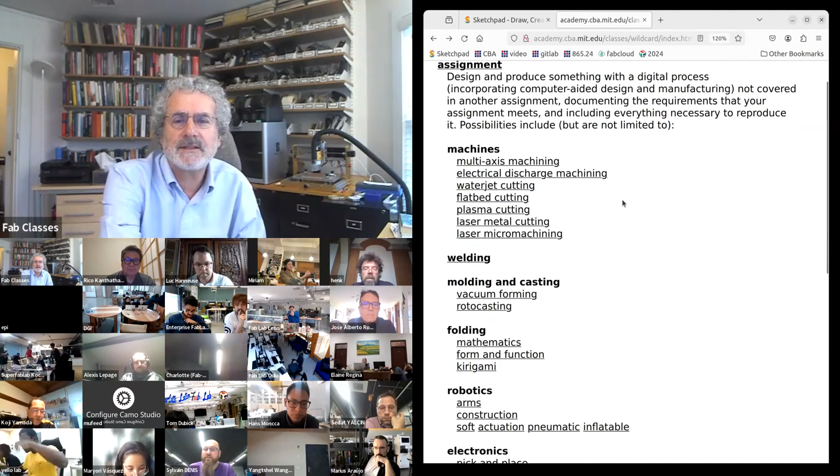In the past, this week was just composites. I have linked to an example here. I'm going to spend about half of class today talking about composites. Tom is asking about computer vision, and Tom, the answer to that's yes, I'm going to come to that. Previously, everybody just did the composites assignment, and you could still do that. But I'm going to spend the first half of class giving you a tour of many other options that would be fine for this week. So first we'll do breadth with many options, and then I'll drill down into composites.

So first one is multi-axis machining. This is a 5-axis machine tool in my shop at MIT. It moves in 3 axes, X, Y, Z, and then it can rotate and rock. That's about a $100,000 tool.

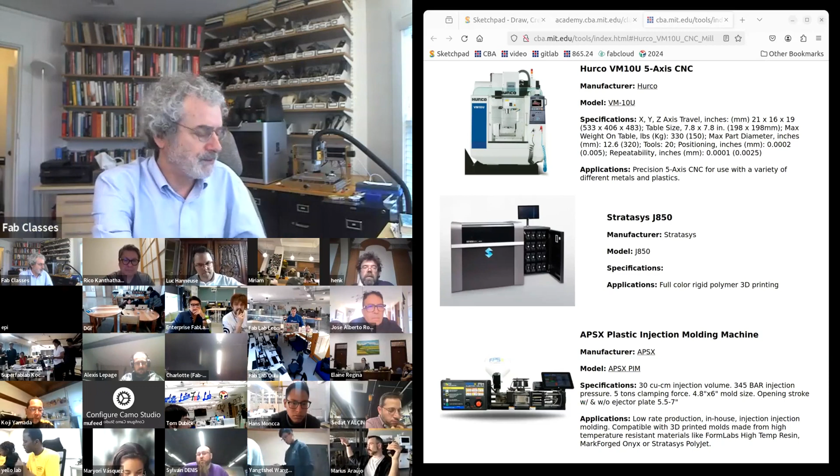You can do that. This is an $800 3-axis mill where you can add a 4th axis. And in fact, for multi-axis machining, in molding and casting, if you printed a mold, you could use this week to do full 3-axis machining. So if you've only been doing 2-axis machining, you can use this to do 3-axis machining. But what I mean by that is a toolpath that's moving Z while moving X or Y at the same time. And if you have access, you could use this to work on 4-axis machining where you rotate while you machine, or go up to full 5-axis machining. There's all sorts of things you can machine in materials that are hard to print, to do multi-axis machining to make more complex geometries with beautiful surface finish.

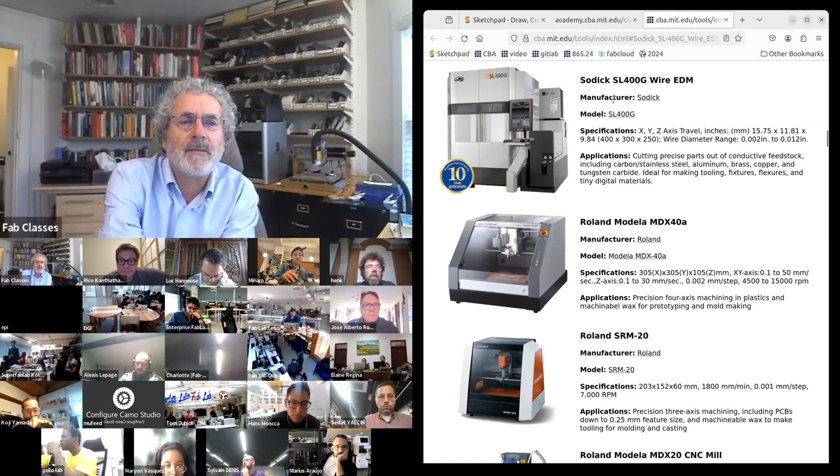So that would be fine for this week. EDM, this is an EDM in my shop. If you have access to that, it's a wire, and then a plasma is produced around that wire, and that eats away at metal, and that lets you make metal parts with high aspect ratios with beautiful surface finish.

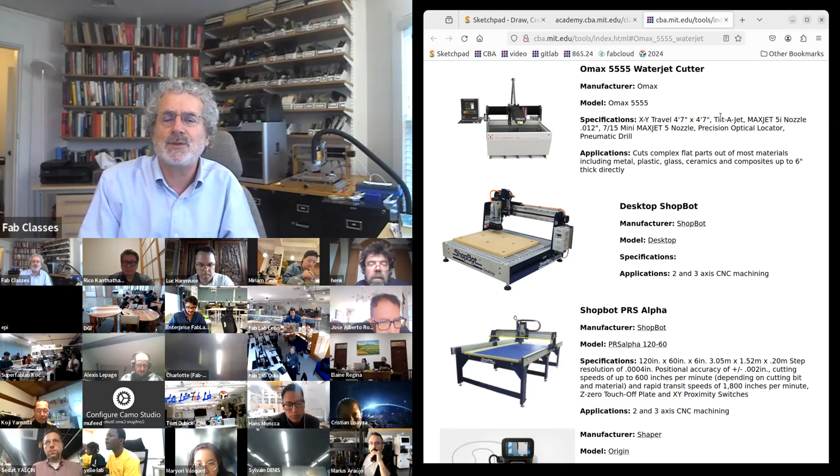This is a water jet cutter. Again, that's about a $100,000 tool. Not Waver, Wazer - Wazer is about a $10,000 smaller tabletop version. The water jet cutter cuts with a supersonic jet of water entraining a garnet abrasive that machines ballistically. And the great attraction of that is you can cut material you can't machine. So glass, stone, ceramic, all sorts of materials that aren't machinable, you can cut with the water jet. That would be fine.

This is a Zund cutter. Again, about a $100,000 tool. It's like a giant vinyl cutter, but a big difference from a little tabletop vinyl cutter is there are many degrees of freedom in the head. So you can vibrate, you can rotate, you can angle, you can punch. There's many more operations than just dragging a knife. And so learning to program a large format flatbed cutter is an interesting thing you can do this week.

Water jets consume a lot of garnet.

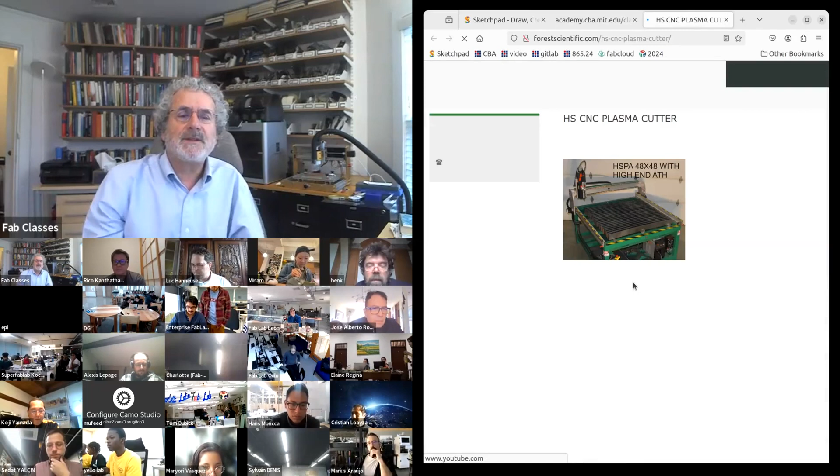Plasma cutters use a plasma generator to make a torch that melts metal. So this is only for metal, but it lets you do large format metal cutting with a plasma torch. Originally those were pretty messy, there's a lot of slag. It's still hazardous and dangerous, you need a workspace where you can shoot out a plasma jet, but the quality of the cuts has gotten much better, so they're much cleaner.

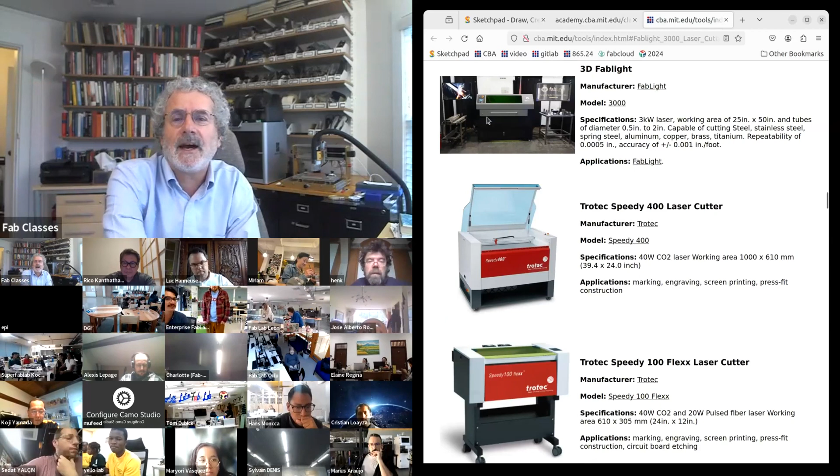Much higher power lasers can cut metal. This is a fiber laser that can do laser metal cutting. And this is another kind of laser in my lab that does micromachining and lets you make micron scale parts with a very different workflow. So all of these would be fine for this week as more advanced kinds of machining.

Welding is a universe - you can do it with oxyacetylene, MIG, TIG, or other types of welding. The welding itself can be manual, but welding is acceptable for this week if you start with a metal cutting process and then use welding for the joining.

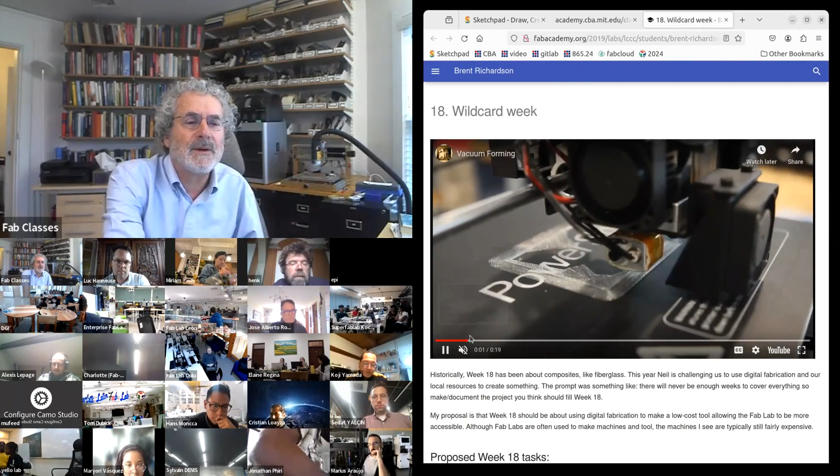We all did molding and casting. We didn't do vacuum forming because it's less universal, but many of your labs have a vacuum former.

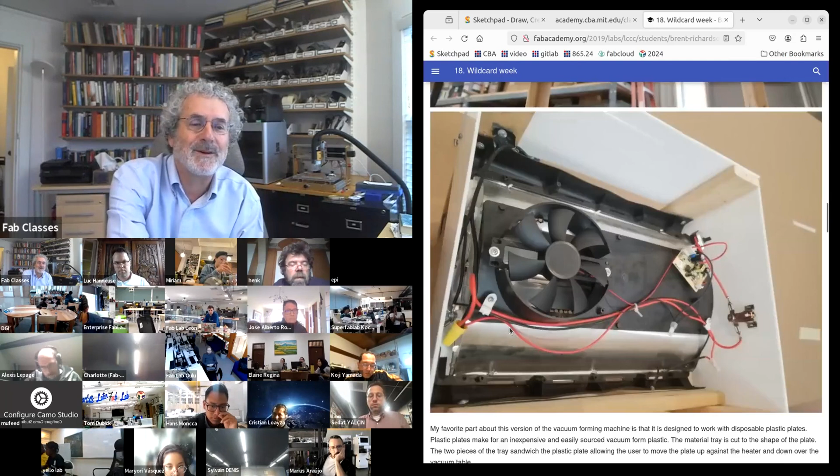This is a project where the student made their own vacuum former, but it shows the process nicely. You heat a plastic that softens, then pull a vacuum that pulls the plastic around your part. When it's done, you get a faithful reproduction of your part. This example, which included making the vacuum former, was used to make a form for custom soap.

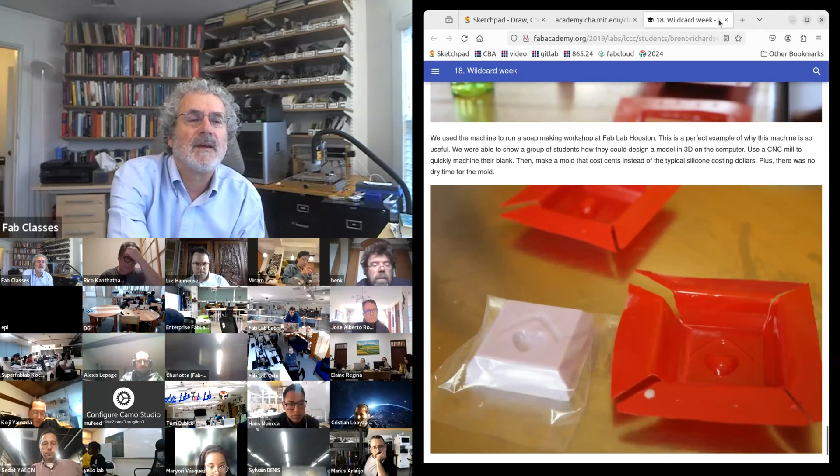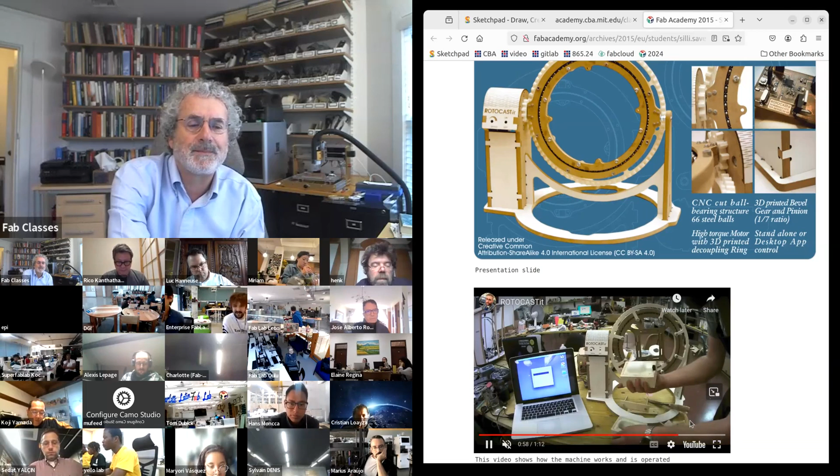So that's vacuum forming. Again, this was another project where making the machine itself was the final project. I'd shown this in molding and casting, but if you have it, you could do that this week. Roto casting is where you tumble the mold to cover the inside surface of the mold. So those are some kinds of molding and casting.

An interesting thing you could do this week is fold. Erik Demaine is a colleague at MIT who's known for taking origami and turning it into a rigorous subject.

Let's see, his site doesn't seem to be loading. I'll send him a note about that. Oh, let's see, is it a network issue? No. Not sure what was happening there.

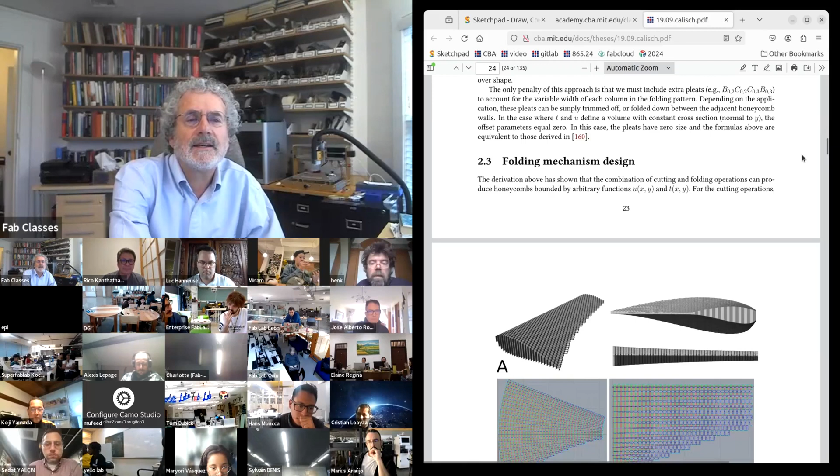This was a student thesis in my lab on cutting and folding. He developed really interesting processes to take a 3D design and turn it into a 2D cut pattern you can fold to make the 3D shape.

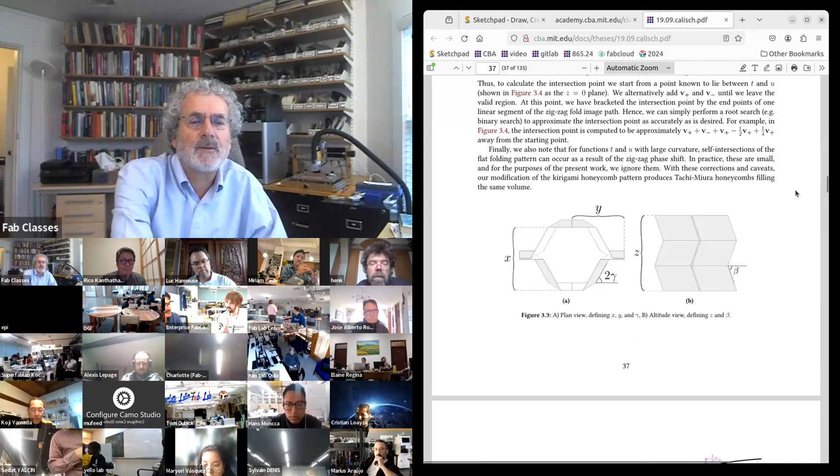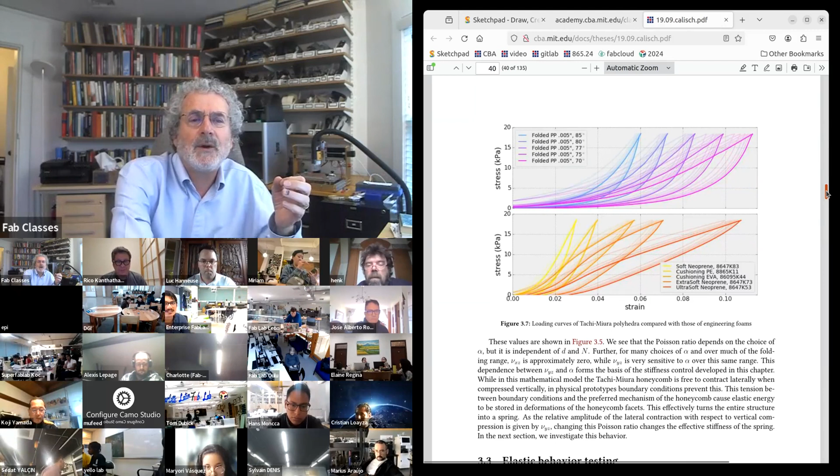He also developed machines to automate the folding. And he went on to show that by varying the cut pattern, you can vary the mechanical properties. So you can have a single sheet stock, but tune it as if it's a wide range of elastomers - here he has a single material. This is the stress versus strain, and he's showing that he can match the range of those properties just by how he folds it.

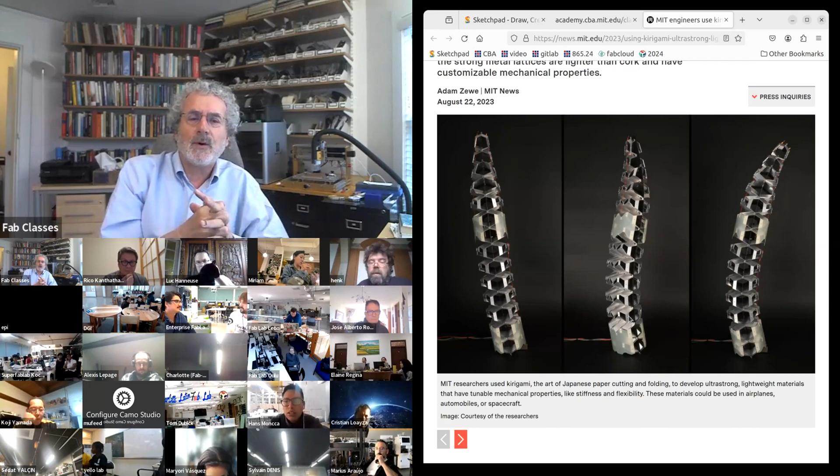This was follow-on work from one of my students on kirigami, which is origami with cuts as well as folds, doing metal folding. In the linked paper, he shows how to design high strength folded structures by cutting and folding metal, which you can also do in other materials.

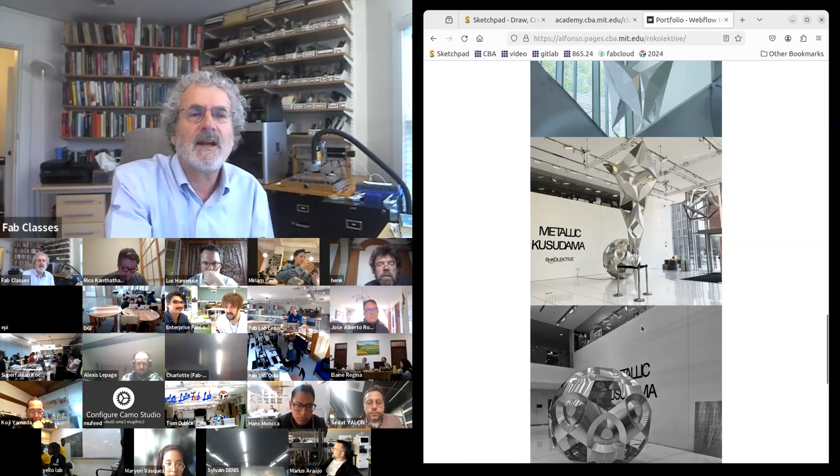A really neat thing he did - I think the easiest way I can find that is here - using those techniques, he did a large format art installation where these pieces were made by cutting and folding. This is an aluminum polymer laminate cut on a large format flatbed cutter, and each of these in hours went from sheet stock to these folded structures.

So folding, and in particular folding to make 3D forms and tuning mechanical properties, is something you can do this week.

For robotics, these are robotic arms in my lab. Something you can do is program the arms themselves to do things like automating assembly. You can also put end effectors on them.

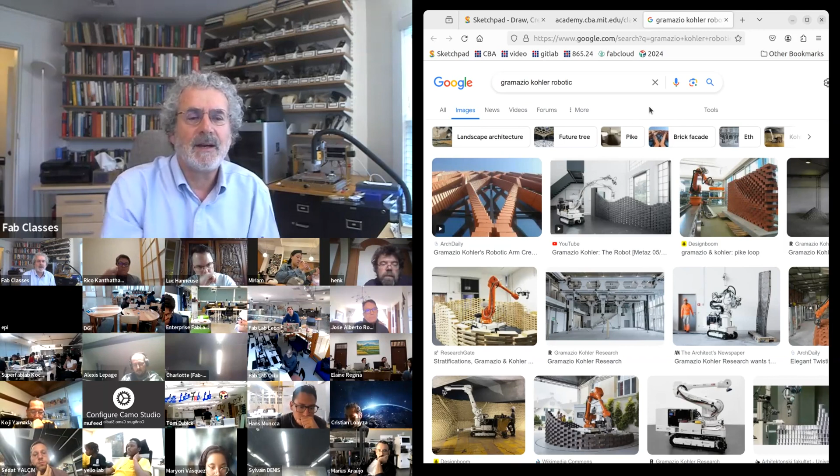Colleagues at ETH in Zurich are masters of programming robots to do building construction. So these are just examples of work in their lab of programming robots to construct.

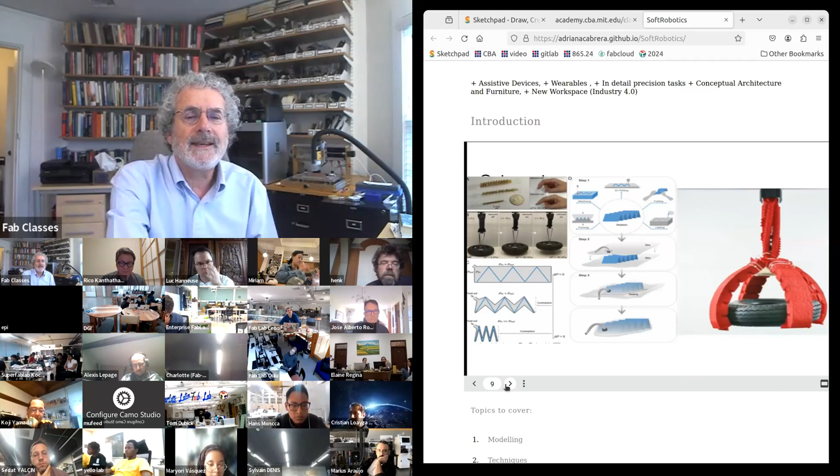Soft robotics is... Adriana, one of the gurus, has this nice tour through molding and casting elastomers to make robots that you deform pneumatically. You can make all sorts of mechanisms, locomotions, robotic behavior.

A colleague at Harvard, George Whitesides, helped inspire this. He made all of these beautiful creatures just building on the molding and casting you've already done.

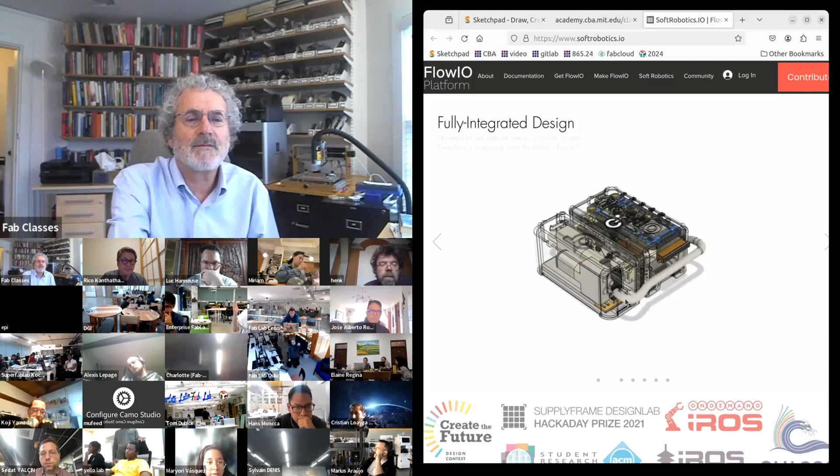This was a student from How to Make who went on and made this little module that makes it easy to program pneumatics for soft robotics. So it's not just the soft robot, this is a kit to make it easier to make soft robotics.

So you could experiment with soft robotics.

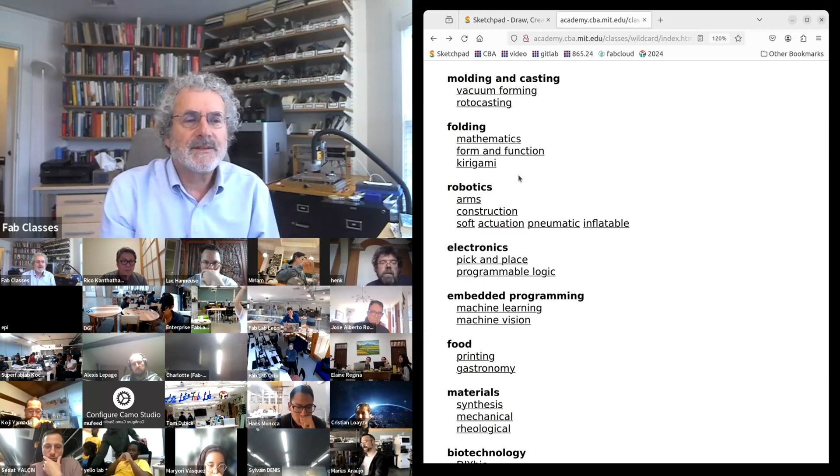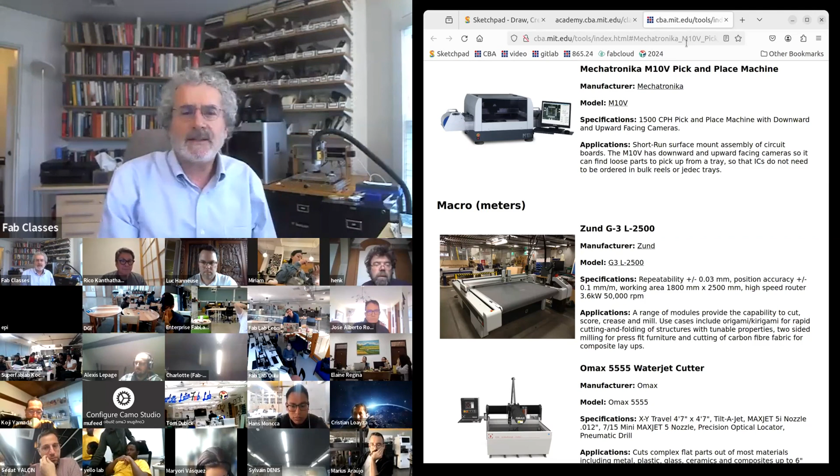Then for electronics, there's a number of ways you could extend it. One is this pick and place in my lab to automate electronics assembly. There's a number of lower cost DIY pick and places emerging. Using a pick and place to do short run electronics production is a new sort of skill.

And then in the embedded programming class, I just briefly mentioned PLDs and FPGAs, and learning to program programmable logic is very different from microcontroller programming. So that would be fine.

Then for embedded programming, this is a link to TensorFlow Lite that runs in microcontrollers. There's also TinyML. These are different enough from the coding I taught. I briefly mentioned this, but we really didn't do it. So learning to do machine learning in embedded systems is fine for this week. It needs to start with electronics that you've made and interfaced, but learning to run machine learning in embedded systems is different enough that's fine.

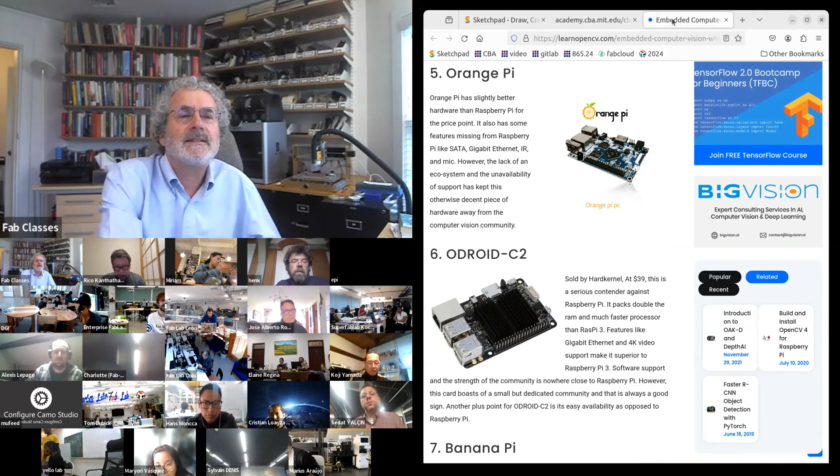Likewise, OpenCV—this is a link to platforms for embedded video. OpenCV is the standard framework for machine vision. Once again, I've only noted that, but implementing embedded machine vision is a new enough skill to be fine for this week.

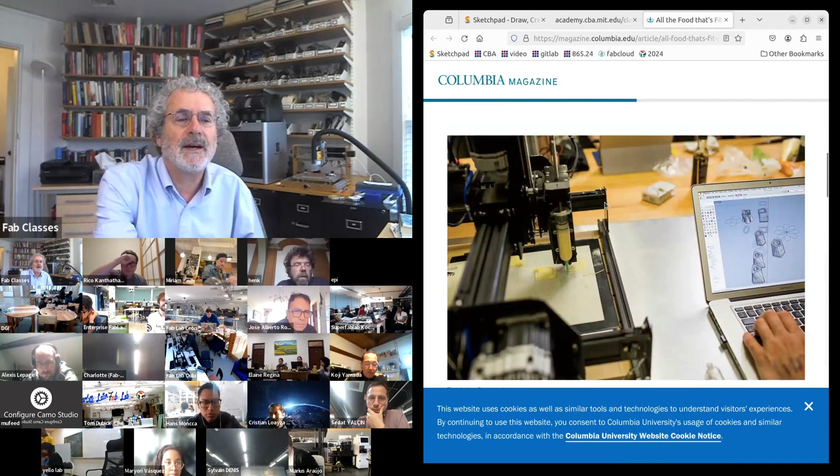Food. This is a colleague who's been experimenting with printing food, extruding it. In particular, they've done a lot of work to understand why you do that, what you can print to make food that you can't do any other way. So playing with food printing.

This is a former Fab class student who got interested—oh, his site is down—but he's experimented with using the range of our tools with food. So using molding, casting, printing, milling, laser cutting, but doing it safely with food to produce food. And not doing it as a parlor trick, but looking at the benefits of that.

So you could experiment with food. Then a really interesting thing you could do this week is experiment with the materials themselves. So Materiome, which we've talked about before—they have a really nice library where you can tour the ingredients in and the applications out.

And so now for most of you, you've just used materials available in the lab. A really interesting thing you could do this week is look at how you use locally available resources like eggshells, coffee grounds, gels, and then from those locally available resources, you can produce materials. And then if you produce the material, going through the existing machines is fine—milling or laser cutting a material you produced is fine for this week.

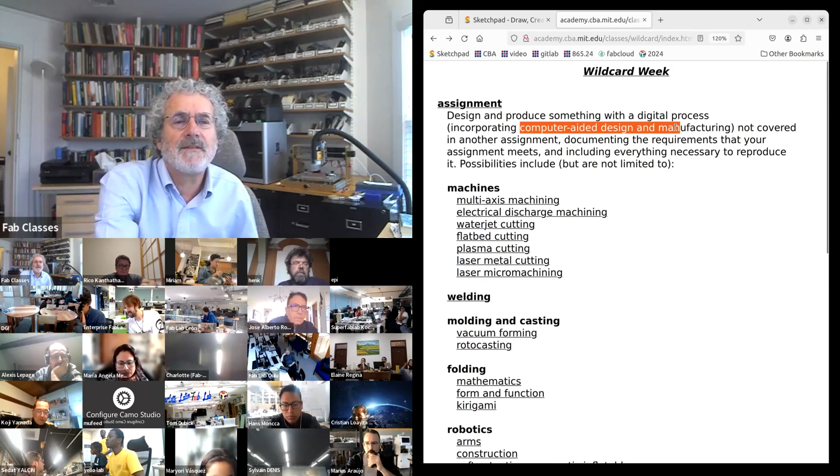Another sister class is Fabricademy to learn about textile technology, and the range of skills they cover fits for this week. So these are all options to work with textiles, and any one of these involves computer design and manufacturing, which is something we haven't covered. This is a broad tour I just did - it doesn't restrict the universe. You don't have to do one of these; you can use anything that meets these standards, but this gives you a feeling for the options for Wildcard Week. And what's fun is seeing the range of what people accomplish.

So that's breadth. Now for the rest of class, I'm going to descend in on composites. I'd say the laser cutter is the most overused tool in a fab lab, the vinyl cutter is the most underused tool, and I'd say composites is the most underused process. Composites let you make large, light, strong things with complex shapes, and it's accessible in fab labs, but not widely deployed.

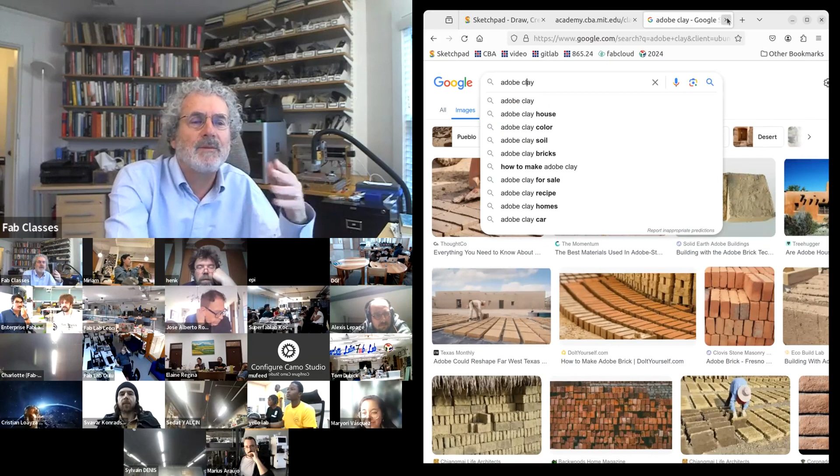Adobe is an ancient composite - not Adobe the software company, but adobe construction, which involves clay with natural fiber reinforcing. Paper mache is a composite. And the most important composite of all is wood itself. What makes trees stand up is the wood fibers in the lignin matrix together making a composite. So all of those are examples of composites.

Now for you to make a composite, you have to pick the fiber and the matrix. You can get the fiber in many forms. You can get chopped fiber that are short segments. Chopped fiber is convenient, but they don't make particularly good composites - there isn't good force exchange between them. If you're making a mold and you put in chopped fibers, it'll have better mechanical properties than not having them, but it's not nearly as good as continuous.

You can have individual filaments that you wind. You can have composite tapes, and that was going on in the machine that makes the barrel. One of the most convenient ways is to start with fabric - continuous sheets of any of these fibers. You cut the fabric to size, and then you lay up the composite. They're convenient and better than not continuous, but mechanically, for things like airplanes, for state-of-the-art composites, it's essential to have continuous fibers.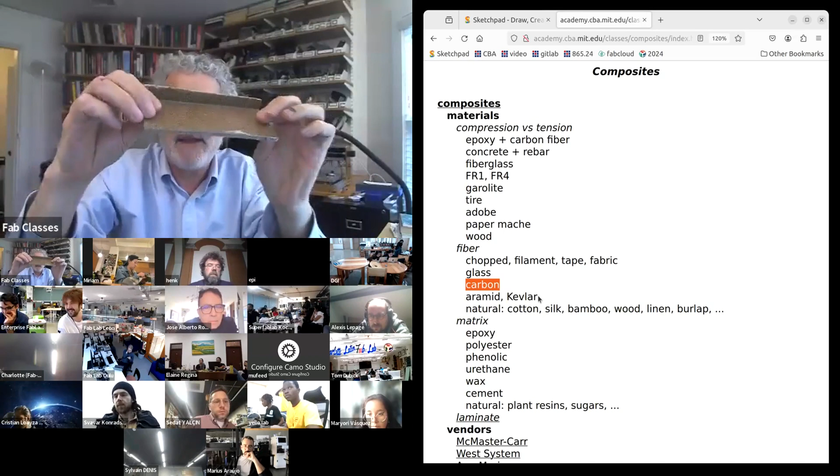In fact, I'm going to grab something up here, I'll be back in a moment. I happen to have next to me here a sample of a natural fiber fabric composite in a matrix. It hurts if I hit myself on the head on it - I can't bend it. This is fabric in a matrix as an example of a natural fiber composite. I wouldn't make a jumbo jet out of that, but anything short of the stiffest, strongest, lightest materials, you can make really nice composites with these natural fibers.

Then to make the matrix, there's a number of options. Most common is epoxy, but just conventional epoxy isn't environmentally friendly - I'll talk about the coupon test shortly. Traditional epoxy is not environmentally friendly, and it also needs really good ventilation. Phenolics are used, urethanes, cement in cement composites. But again, there's a lot of work on natural resins, and I'll show you when I get to vendors, natural sources of environmentally friendly resins.

Something that's next door to composites is laminates. Traditionally in skateboard making, you can start from fabric and lay it up. But what's common is you start with laminates, which are thin plies of wood, which are itself a composite. Then you heat and squish those and laminate the laminates. So rather than starting from fabric, you start from wooden plies and lay them up - that's a common way to make skateboards.

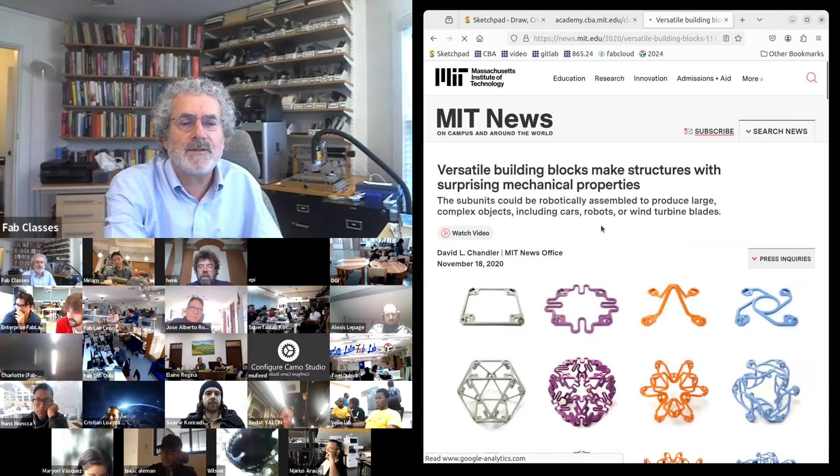And we went on to show, and these are things I think I've shown before, by changing the shape of the parts, you can tune: this is rigid, this flexes. This is what's called auxetic, so when you push it, the whole thing shrinks. This is what's called chiral, so when you push it, it twists.

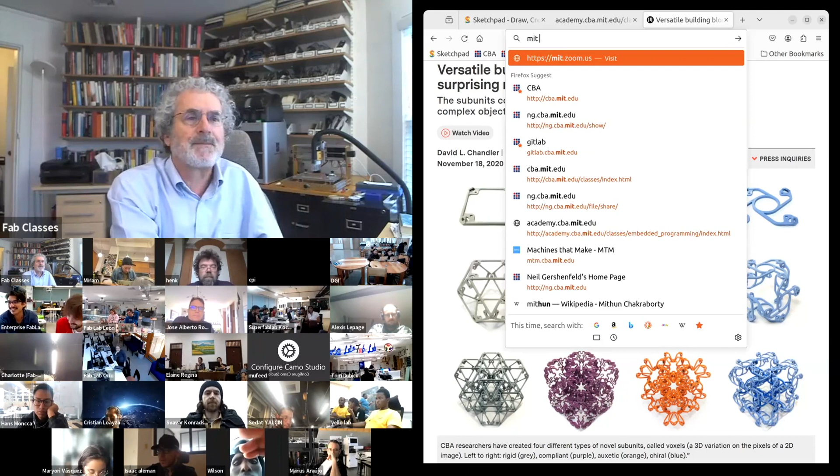And we use those sort of parts to make, this is a test airplane that instead of a big tool is made out of assembling lots of little parts. And so these are discretely assembled digital composites.

Okay, so you've picked a fiber, you've picked a matrix for it, you've designed your composite. Now, how do you make it? So the first note is, this is a design tool to design the composite. Let's say you wanted to make that helmet. If you just take a flat sheet of fabric and drape it over the helmet, it'll have wrinkles. So what you do is you make cuts in it, and the cuts are such that when you lay the structure up, they all line up and you get a smooth, continuous structure.

And so there's software to help you design that. But one of the ways you can do this is if you design a mold for your composite, for the helmet. So this picks right up from the molding and casting class. If you lay the fabric for the composite in the mold, you'll see where it bunches up, where it doesn't lay flat. And then you can make darts. You can make cuts that remove the material where it bunches, so then it lays flat in the mold.

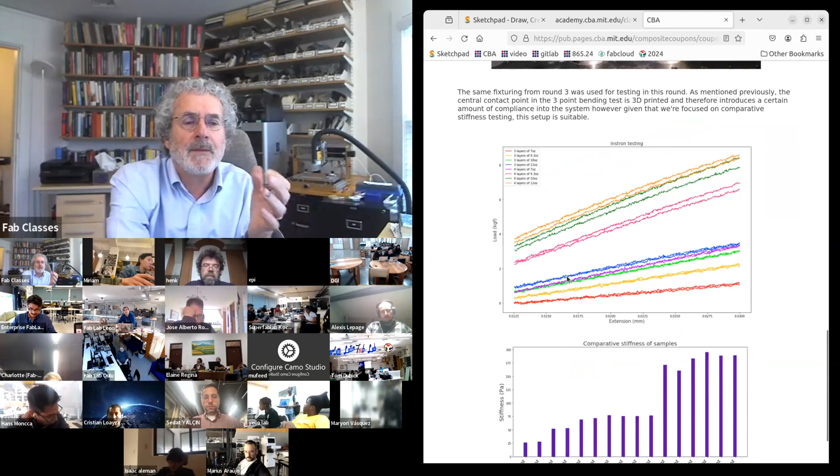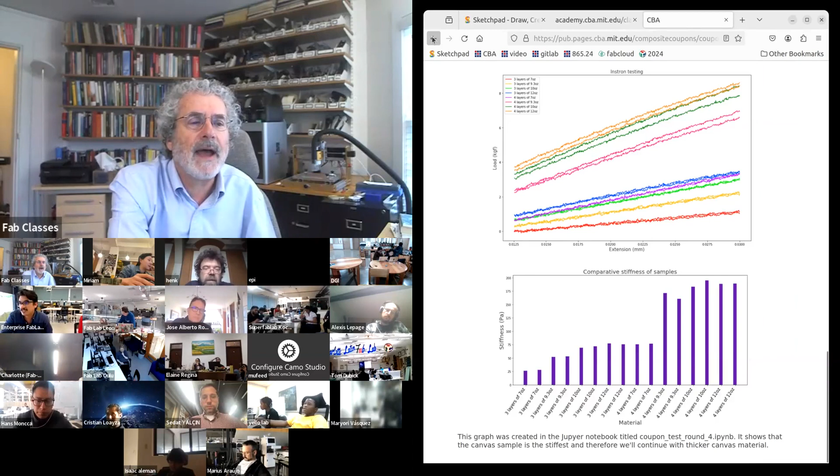Now, this term I've been using, coupons. A coupon is a test composite. And this was a series of tests we did of different materials. A coupon is you make a strip out of the composite and you use it to test the process. And so when you're learning about composites, before you spend a lot of time with your mold, start by making just simple rectangular strips to test your fiber and your compaction. And what came out of these tests, for example, is we found how good linen is. We compared a number of different materials, and it showed that linen has surprisingly good properties to make friendly composites. And this is linked to analyzing, using one of those material testers I showed you before, lots of different materials. So if you're going to start composites, make little test coupons.

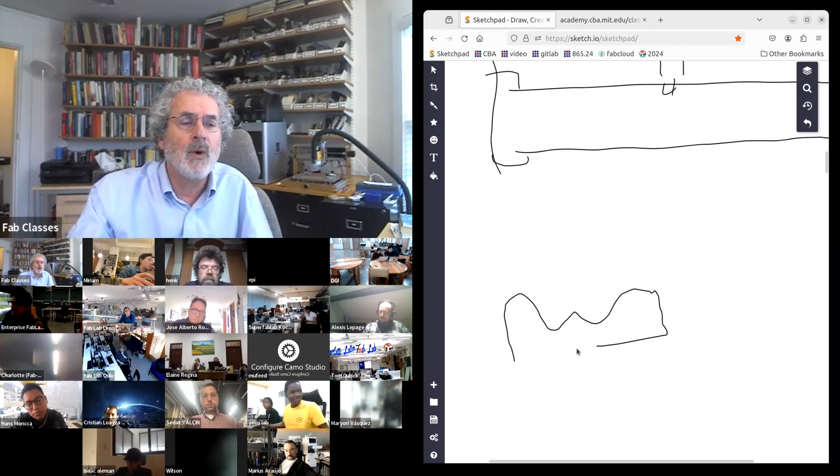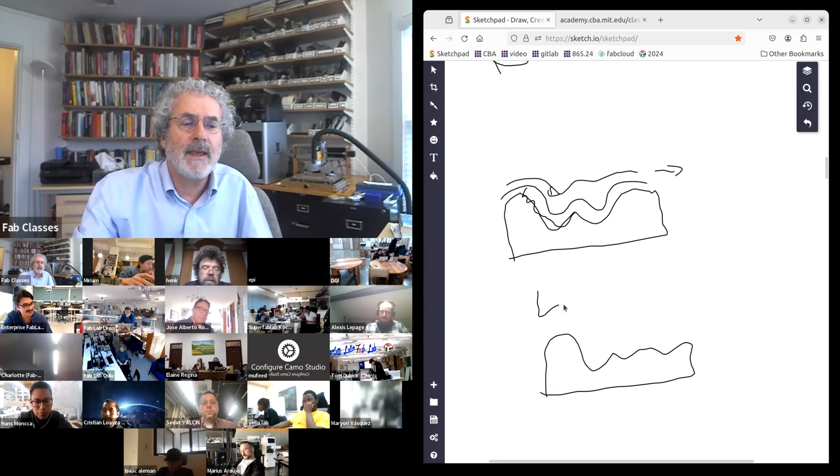Now, there's still a whole tree of decisions. So an open mold, which was more common traditionally, is you make a mold that's one side, you lay in your composite and resin, and then we're going to have a top layer and pull the vacuum. So now this surface has a really good finish that matches the mold. The backside doesn't have a good finish. Compare that to a closed mold: you make a mold for one side, and then we're going to make a matching mold for the other side. We lay in our fabric and resin, and then we compress the two-sided mold. The one-sided mold needs you to pull the vacuum. The closed mold, which is a two-sided mold, eliminates the need for the vacuum and can let you get larger forces than vacuum. And so increasingly, composite production has moved from open to closed molds.

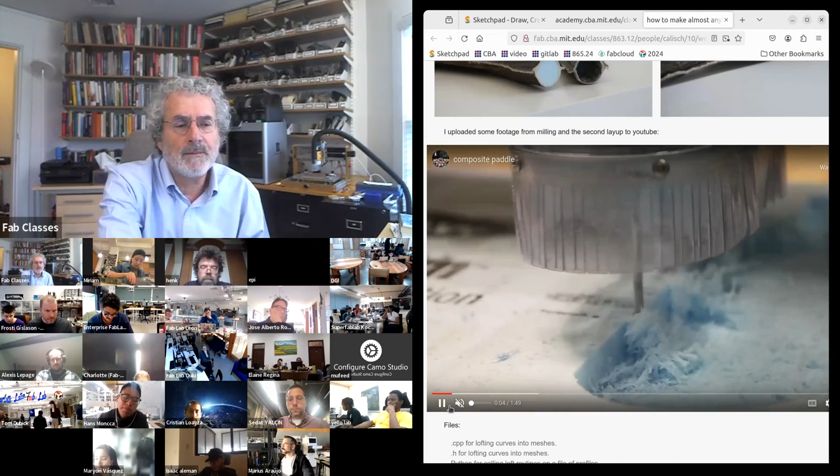Okay, then we need to get the resin in. The easiest way to do this is a wet layup. And I think Sam has, yeah, good. So here's Sam who made that, and Tom's his helper. And he's going to show the steps. So first step is he's machining the form. And remember, the mold can be outside squishing in, or the mold can go on the inside as a core that you form around. So in this case, he's making these paddles, so they'll be the inside. So here he's machining the form.

Okay, now it helps to have a helper for this. Sam and Tom, this goes pretty quickly. So Sam and Tom are mixing the resin. They've already cut the fabric to size. So what you see, I want that to go away, is these are sheets of the fabric cut to the final size. And they're going to do wet layup, meaning they're going to spread the resin and squish it into the fabric.

So here they are spreading the resin in the fabric, then taking each ply of the resin-infused fabric and laying them up. And you see those skinny ones are because he wants some stiffeners where it joins the body of the paddle. So he wants it a little thicker there. Okay, now he's laying them up into position around the forms.

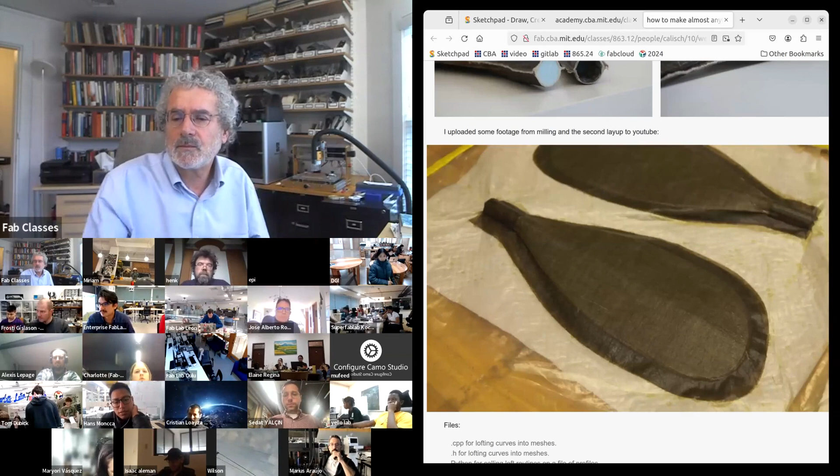So now that's called wet layup because it's exactly what it sounds like. It's a wet layup. And now in this case, he's going to vacuum bag it to do the compaction. So there's the vacuum bag, and I'll talk about that in a moment, what's actually inside the bag. He pulls the vacuum, and then it's now squishing down and it's driving the resin out. And now he's got these high-performance composite paddles done. So that's an example of wet layup.

Joaquin is asking a question in the chat about reverse engineering. Can you scan and print? Joaquin, reverse engineering would be fine for this week as long as you close the loop. So scan, print, and then measure what you print to measure the deviation. As long as you characterize the process, that's fine for this week.

So that's wet layup. Pre-preg, which used to be common, is where you buy the fabric with the resin in it. And to prevent it from curing, typically it's refrigerated. So you need to keep it cold. That's a nuisance. And then in industry, most common is RTM and VARTM. So RTM is resin transfer molding. And that's where under a lot of pressure, you force resin into the mold. And VARTM is vacuum-assisted resin transfer molding, where you pull a vacuum on one side to pull it out, and you push in from the other side, and that pumps the resin in the mold.

And so compression molding is where you have a clamp. Inflation, this is how bike frames are made. When you make a bicycle frame, typically it's done by inflating it from the inside into the mold to make the form. And then vacuum bagging, a crude way to do it that works surprisingly well is these vacuum bags just designed to shrink clothing down. But you can use these as simple vacuum bags for composite vacuum bagging.

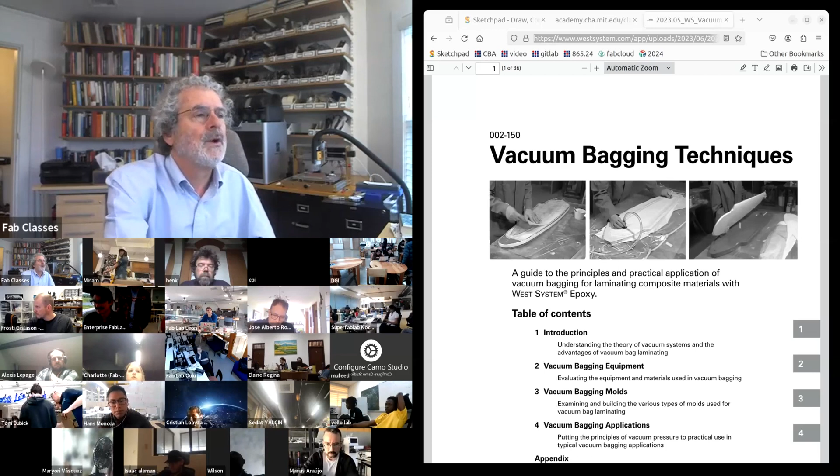And now this is a link to West System. Oh no. Let's see. Let's see if they moved that and I can find it. Oh, good. Okay, so they just moved the link for it. I'll have to fix that link. So this is a nice app note that describes all the steps.

And in particular, there's a figure I really like here. This shows what was going on in that video. So you have the mold. This shows it flat, but almost never is it flat. There's usually shape to it. We might be making a part of a car body, a bicycle helmet, a briefcase. You have your laminate. Okay. Then after the laminate, there's what's called a bleeder and a breather.

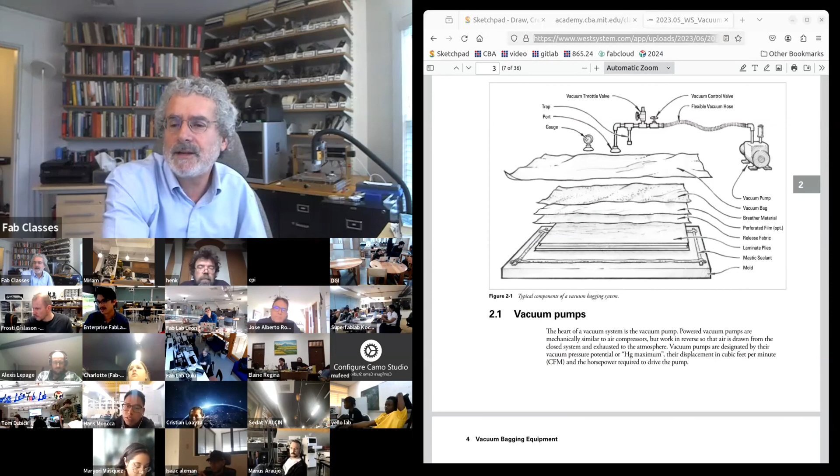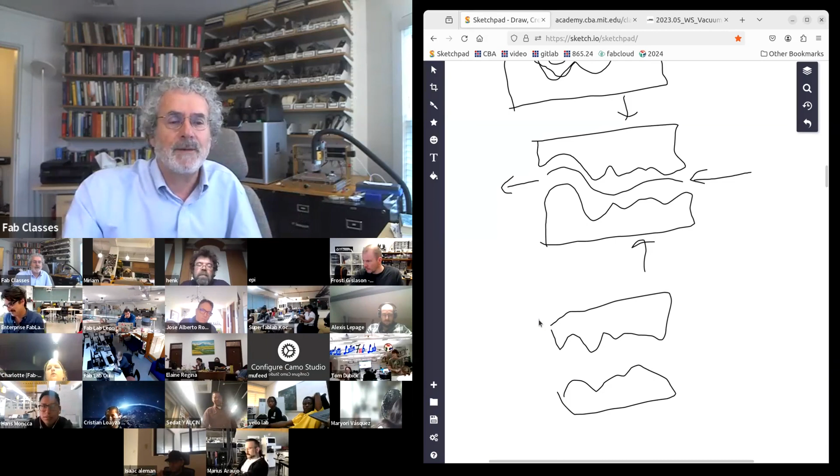So when Sam did his layup, if we go back to that, right here, you see those dots. What's going on there is we have this bleeder layer and the breather layer. And if we take this example, let's see, so I'll make a mold. And again, I'm just drawing an arbitrary mold, but think a skateboard, a bicycle helmet. If I lay up my plies, I infuse with resin, I then compress it.

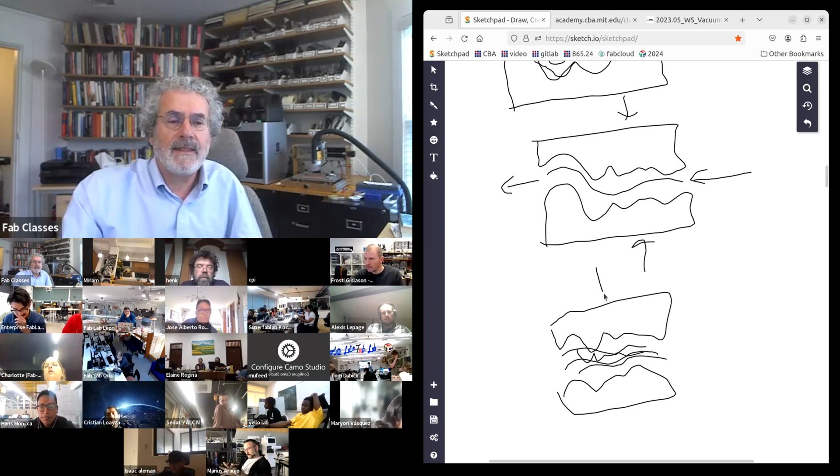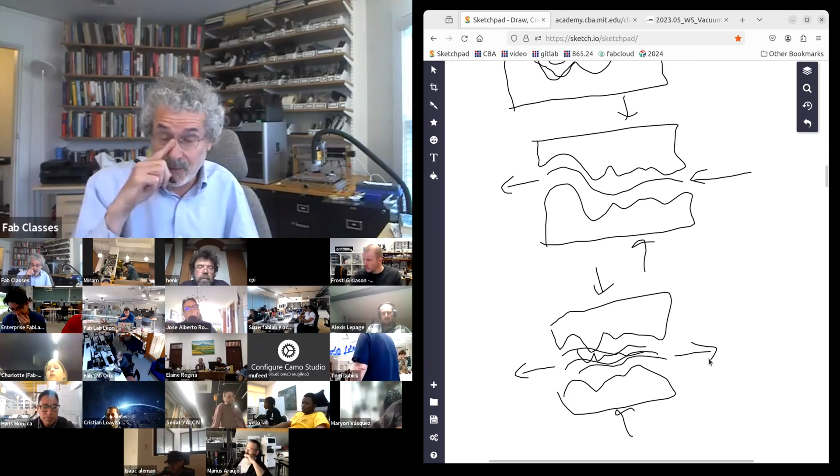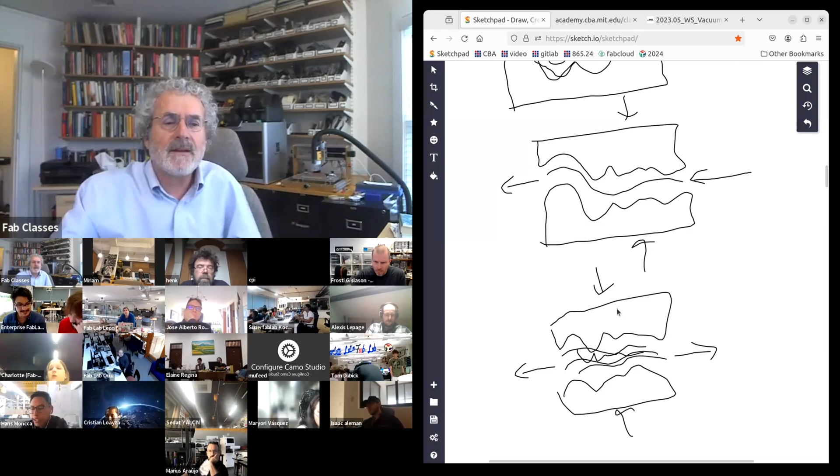If the mold isn't very large, what I can do is I can squish the epoxy, the resin, out the sides. So in resin transfer molding, you actually force the resin through the mold. In a kind of beginner resin transfer molding, what you do is you squish from the top, and then the excess resin migrates through and goes out to the sides.

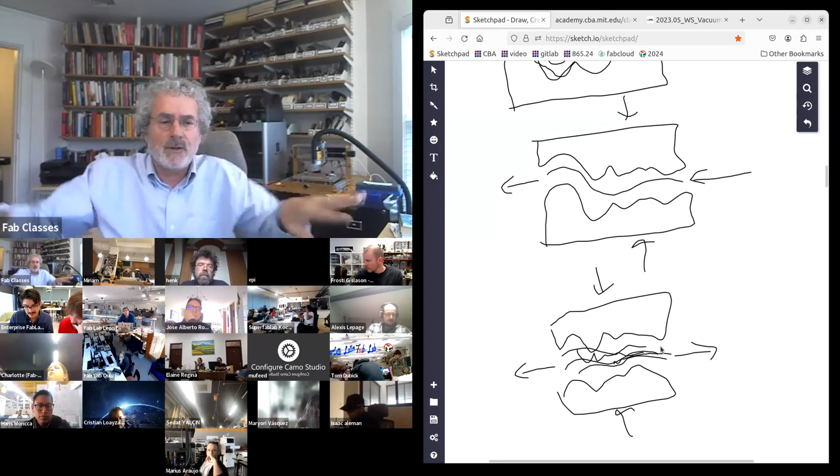And if the mold isn't too large and the force is large, you can do a good job with that. The problem with that, again, is if you have a really big mold, like say you're making an airplane, it's hard to get the excess resin all the way out to the sides. So then what's happening is you have your plies in the mold.

Then you have a sheet that has holes in it, a bleeder, and then you have a breather. The breather is like soft cotton. When you pull the vacuum, if you pull it right away, there's nowhere for the excess resin to go. But if you have the bleeder and then the breather, the resin goes through the holes in the bleeder and then gets absorbed in the breather. And that's what's happening in this image down here - the excess resin going from the layup through the bleeder to the breather.

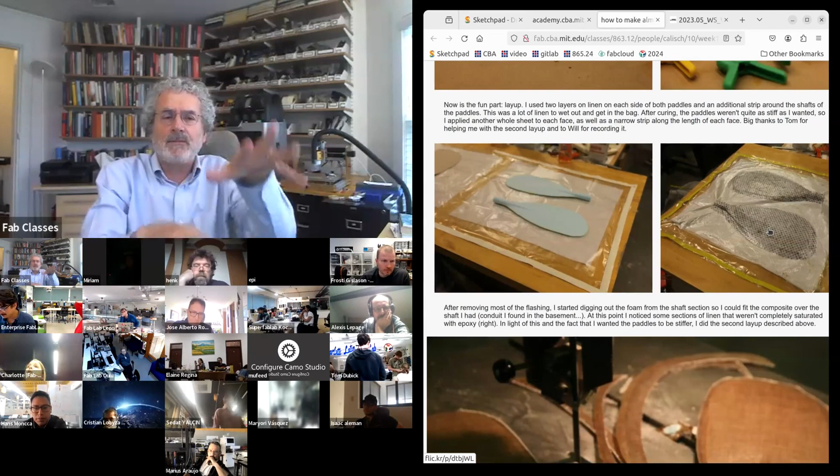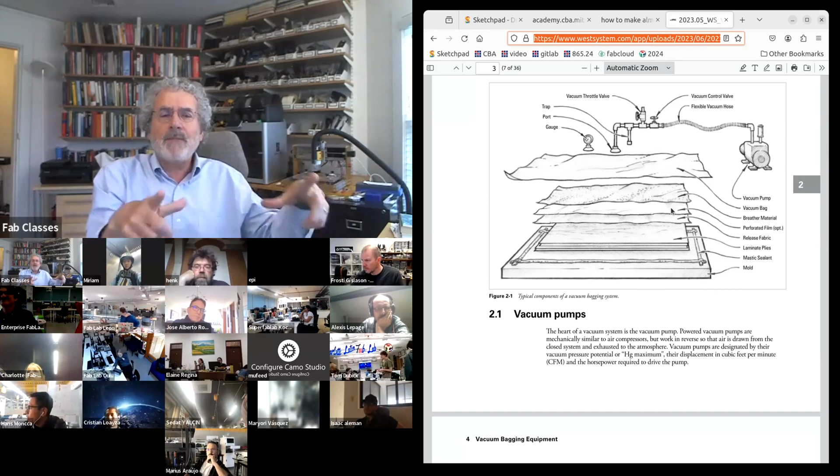So these are the steps in laying up. Then finally, outside the breather, you have the vacuum bag. I showed you can buy a preset vacuum bag. Commonly, you just have a polymer sheet, and then you have a sealant - a kind of sticky, dense clay that you can use to stick it together that withstands the vacuum. So a common skill, and this shows all those steps, is to make vacuum bags.

I would say, though, especially for Fab Lab scale composites, there's a lot of vacuum bagging that can be done with compression molding. Compression molding is where you just clamp it. Compression molding eliminates the need for the vacuum bag and can actually give you better compaction, which means a better composite than vacuum bagging.

So after that is an autoclave. One of these giant tools is heating it to help cure it, but it's also putting on an overpressure. So you can actually go beyond atmospheric pressure and have even greater pressure with an overpressure autoclave.

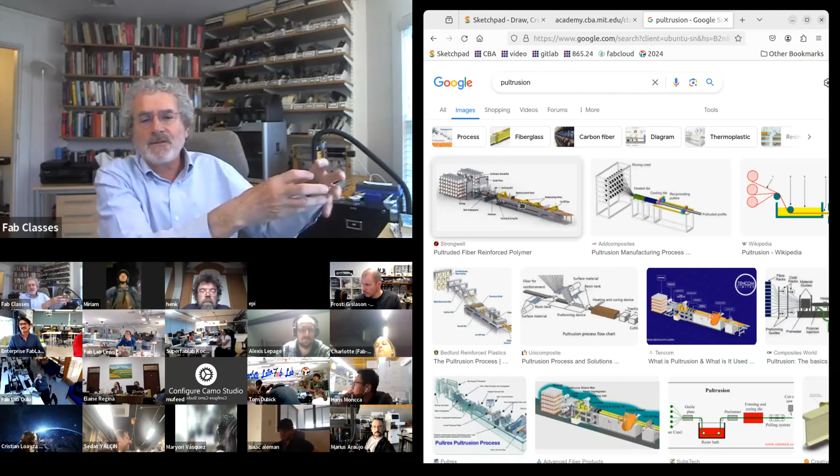And then two final notes. Pultrusion is if you wanted to make a continuous composite part. Pultrusion is where you do all the steps I described on the fly and you pull a composite out. This makes things like composite beams or pipes.

Once you're done all of that, typically the edge of the composite is rough, so you need to trim the edge, and that matters for safety, which I'll talk about. And then typically when it comes out of the mold, the surface of the composite is a bit rough. So a common final step is a clear coat. When you look at a composite bicycle or a composite car, it has a smooth, shiny surface. It doesn't come out of the mold with that smooth, shiny surface. Clear coating is a final step where you fill in the irregularities using, again, molding and casting materials.

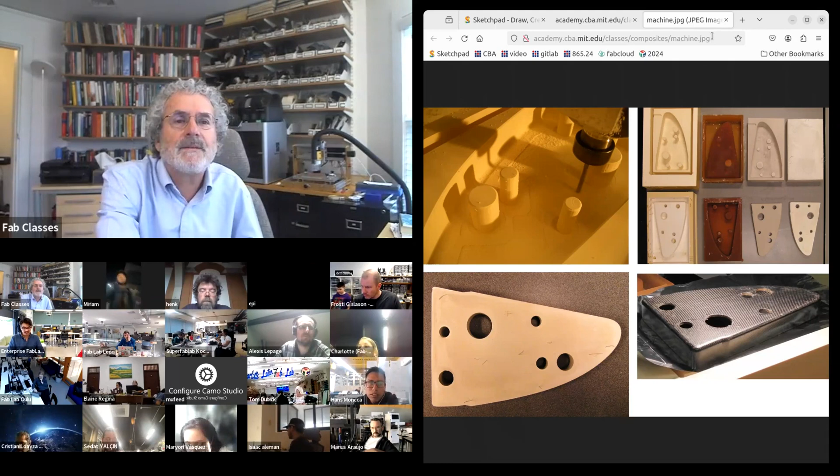So to make the mold, most commonly you machine it. This was an example from one of my students, who actually made a smart mold. He's machining the mold, but what he's actually doing is casting into the mold both heaters and temperature sensors. Around this mold, here's a beautiful carbon fiber epoxy part he laid up. In fact, you can see the darts in the part in that little line there. So most common is machining the mold.

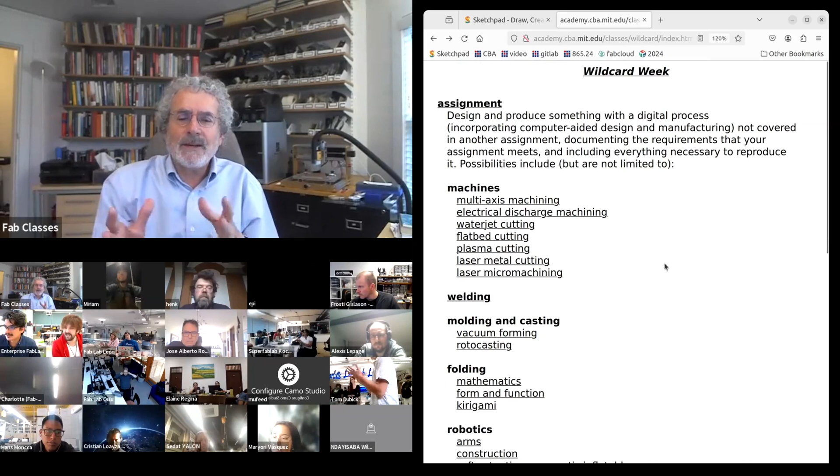Stepping back, we're fairly forgiving. The one thing we don't want to see this week is just a better version of an assignment you already did, and we don't want something that's just simply a craft skill. We want to involve design tools in a way that you can transfer it so somebody else can reproduce your work. Other than that, any of these options are fine. The goal is not for everybody to do the same thing, but for everybody to do a different thing and use this to see the range of techniques possible in your lab.

And so that's Wildcard Week.

As usual, open time, and there's only a few of those left - make good use of them. We have the wonderful all-in group talking about who gets access to labs, how you reach your community, how you have impact. That's gone from a recitation to a working group to a class, and we'll have some presentations from the class. Then after this, we're done with new technical topics. This class is going to be on how systems fail and how you design the integration.

Then I'll talk about implications, applications, IP, and then we're up to final projects. So please make sure you're working in a tracking project. Please get going on your global review to leave time for global to local and local to global. And please make a schedule for the remaining weeks to figure out how we can get you through them. If you miss that, you don't fail, you just go into continuing, but we want to get as many of you through as possible.